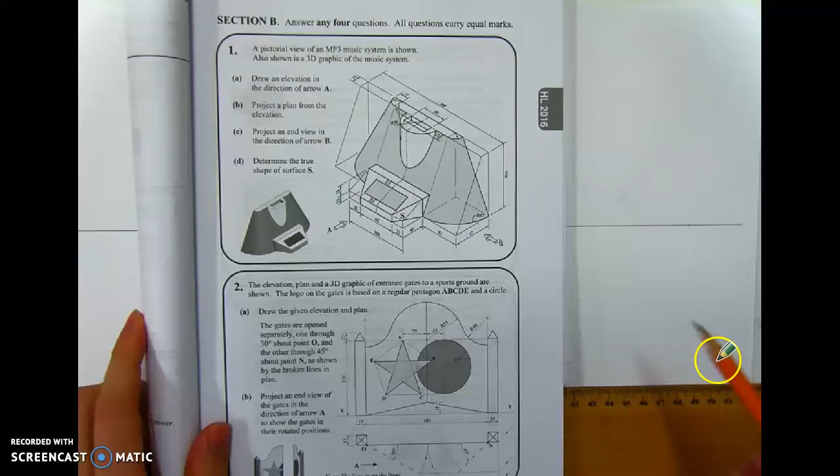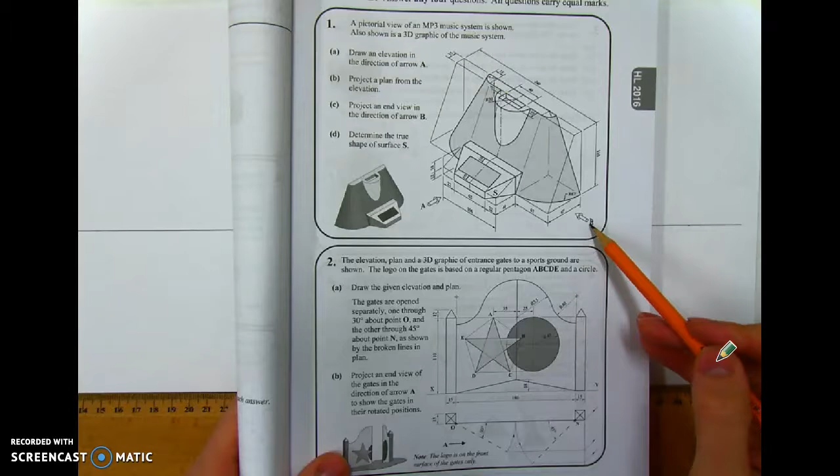This is 2016 question 1. Part A asks to draw an elevation in the direction of arrow A. So because it's positioned here on our end elevation, they want us to take it to the left. We're going to position our elevation in the top right hand corner.

So the overall height is 110. We're going to measure down 120 to our XY line and leave a space from the edge. Come in roughly 20 to 30 millimeters. The overall size of the speakers is 110 by 240. So put it inside a rectangle.

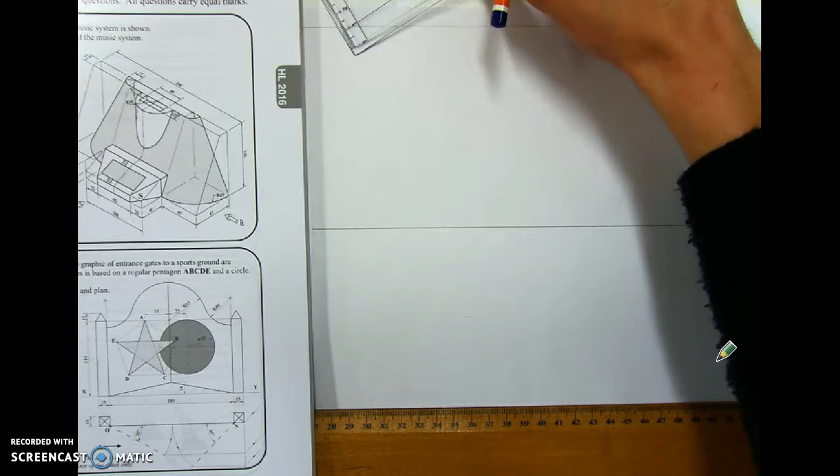Now mark up all of our heights and all of our lengths. 67, 22, 62, 22, and that should leave us with 67. We can bring our heights up nice and lightly, 2H pencil.

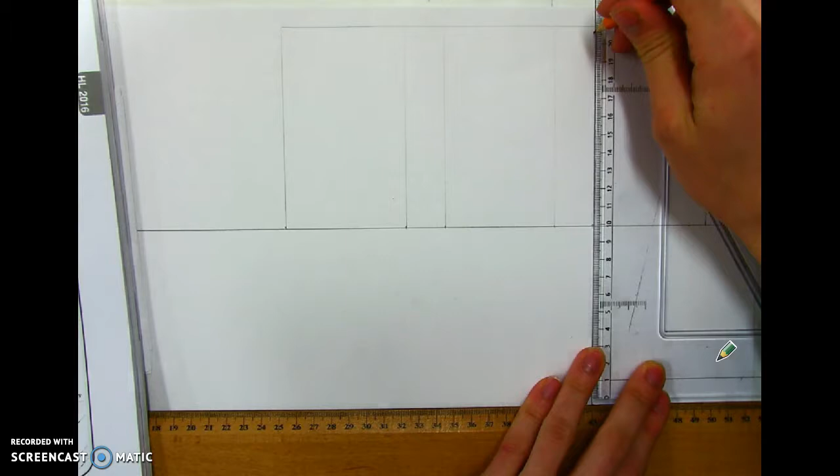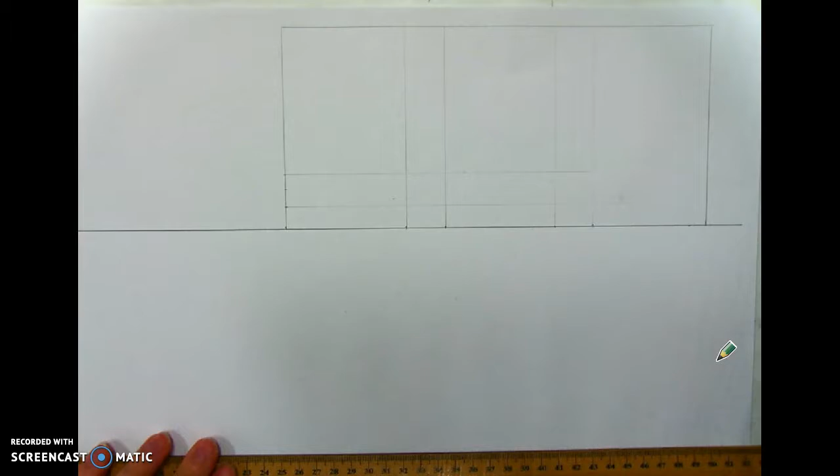We will take our heights now along the side. 22. Sorry, apologies. 12, 18, 12 and 18. Now at this point we start to harden in some of the detail on the elevation.

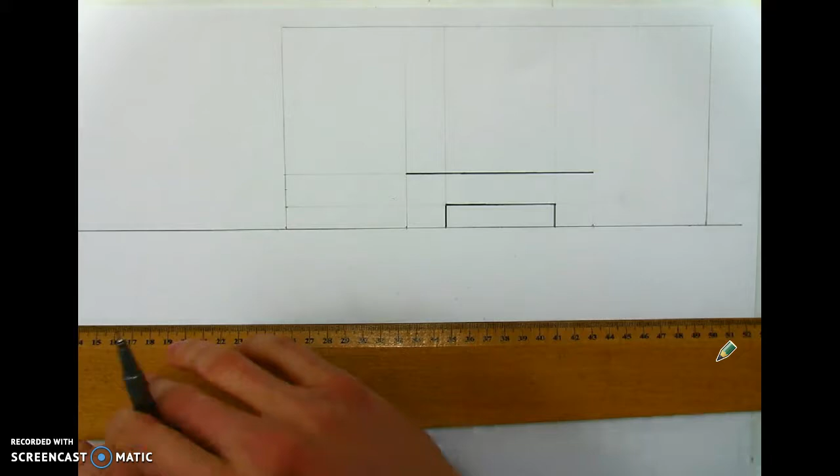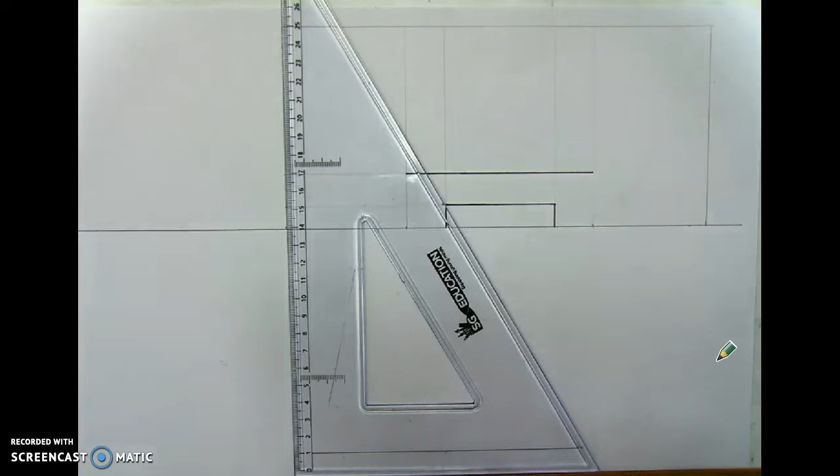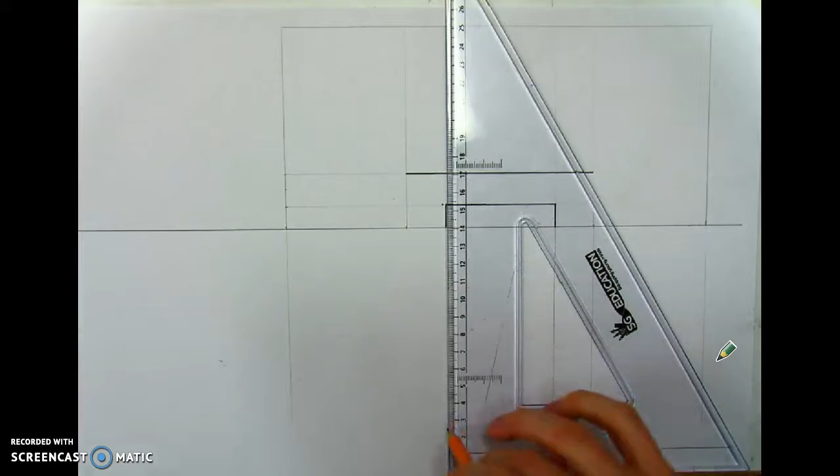Now we're going to bring this down into our plan. Leave a gap of 20. And our depth is 67. And at this point we step out a further 40 mil.

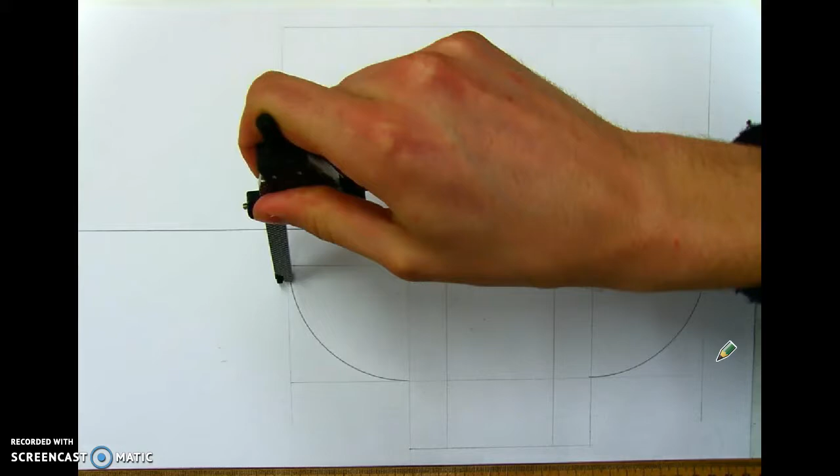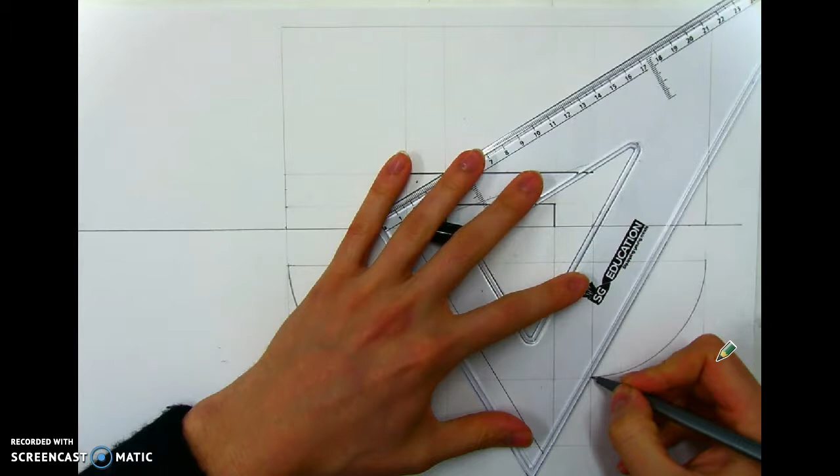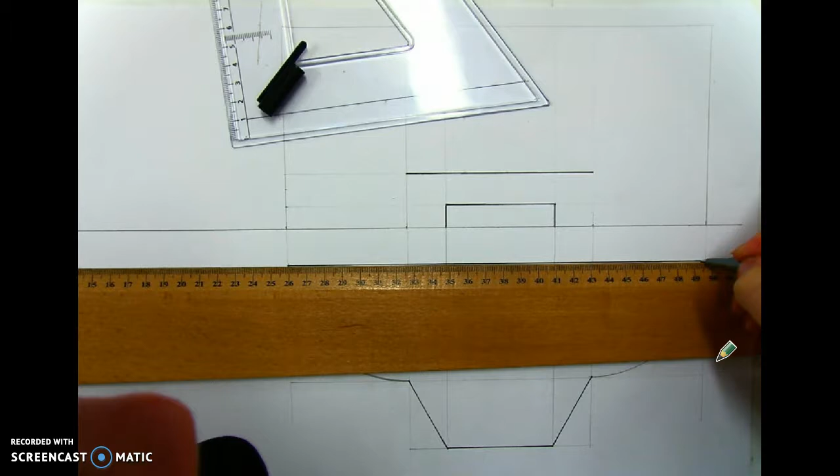Going to mark the radius on both ends. Step back 22, which we've already done here at this point, and we join it back like so to touch the base. We must then mark the radius, smaller radius on the top, 15 mil.

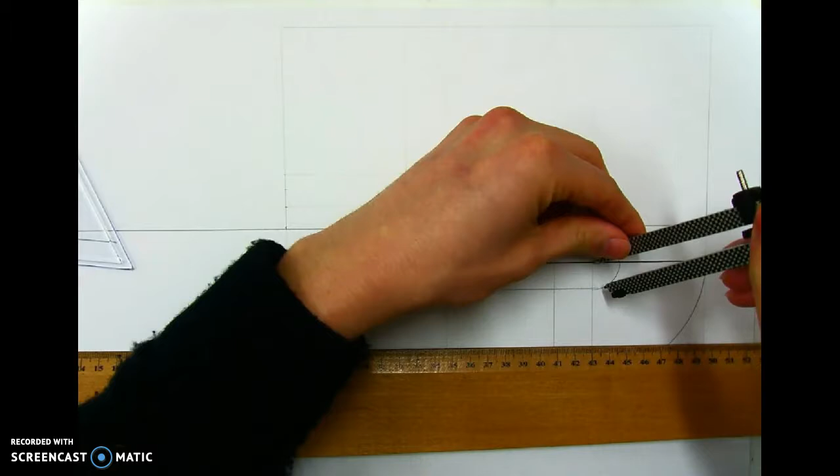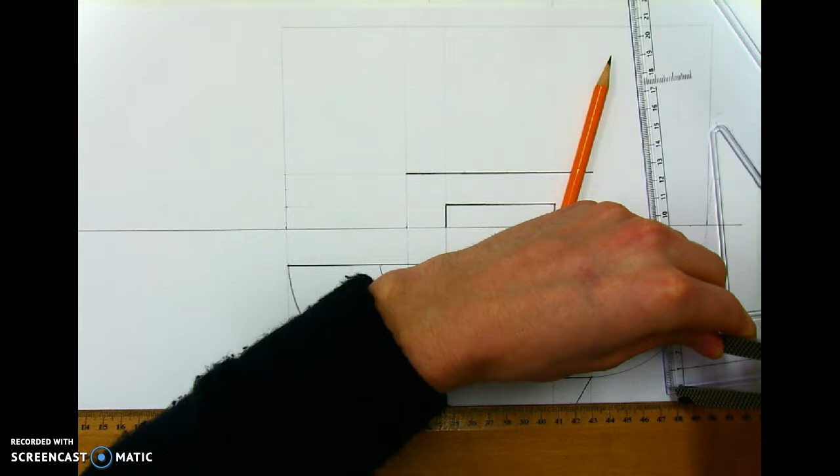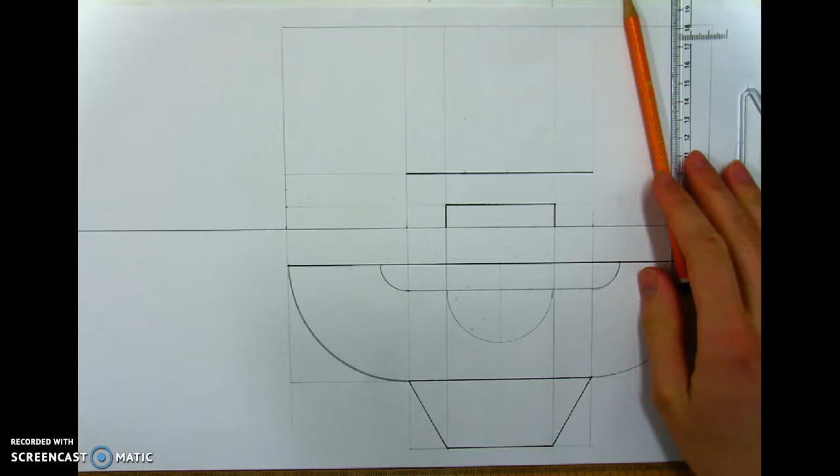Find the center line, halfway in, which is 140, and we have a radius 30 mil then to mark from the top view looking down. In that we have a 15 mil slot, 40 mil long, so 20 mil either side. And it's 15 mil.

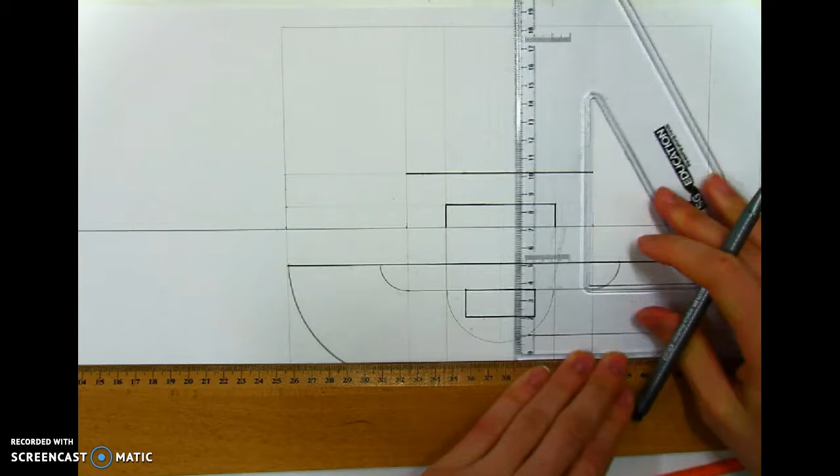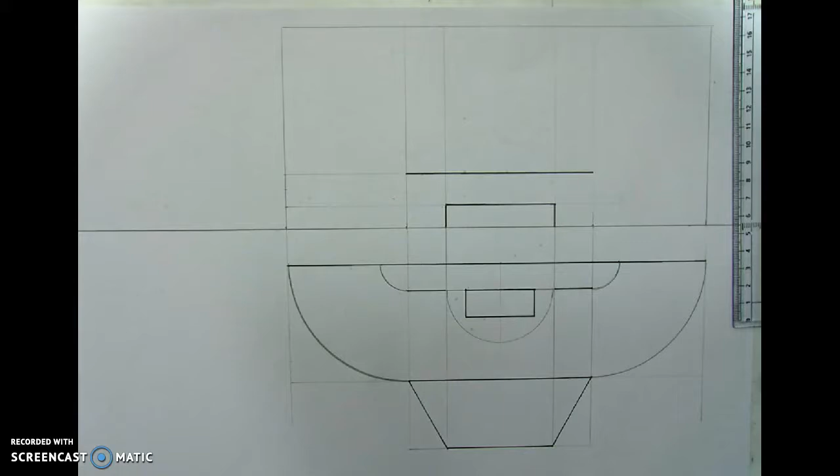We can't do the shape, the rectangle on the slope surface, or can we do this part until we work backwards from our end view. So from here we bring our lines across, just draw in our YY line, extend that line down there, bring all our points over to it. And bring them up at 45 degrees.

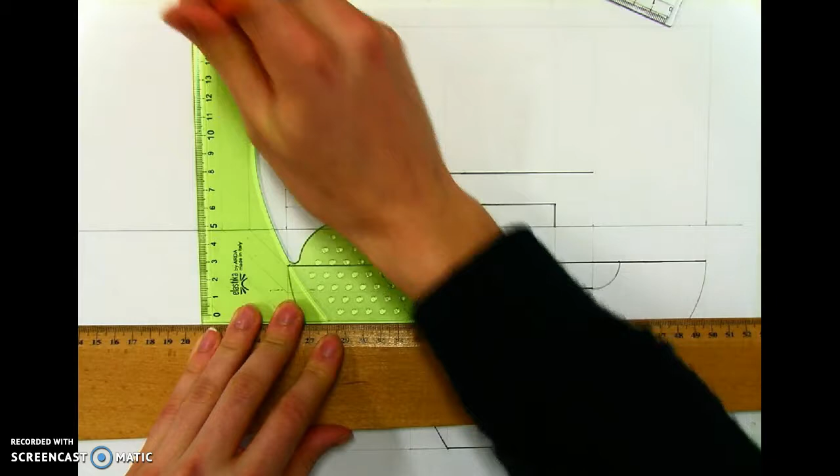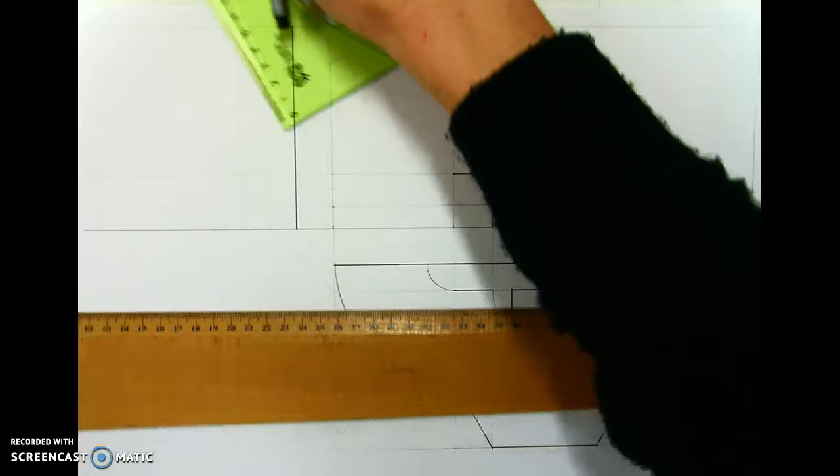So we're going to continue with bringing all these lines up and bringing all these lines across. Once you have them all brought across and all brought up, harden in the ones we want with your HB pencil. So we have the side, and we have our slope surface coming down.

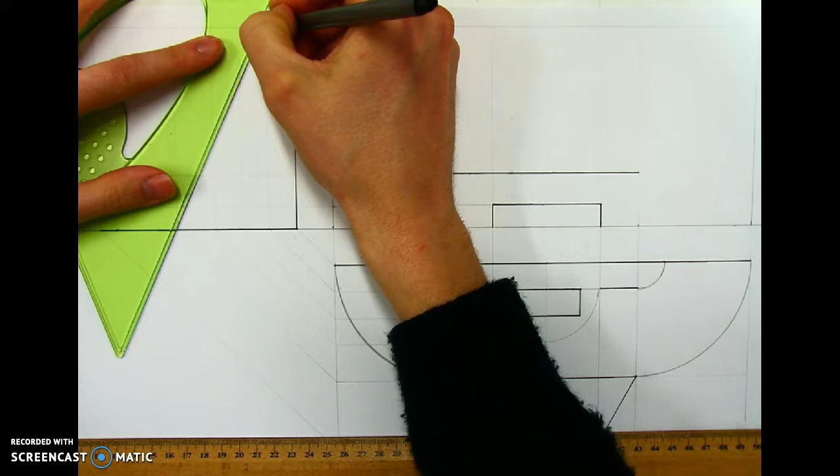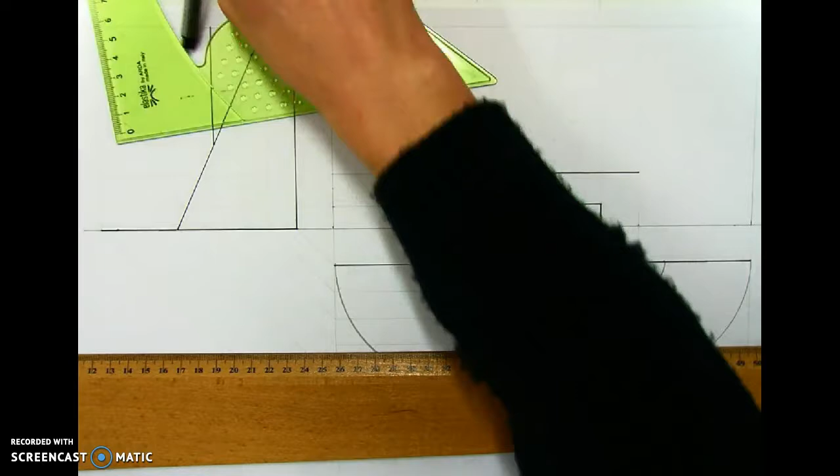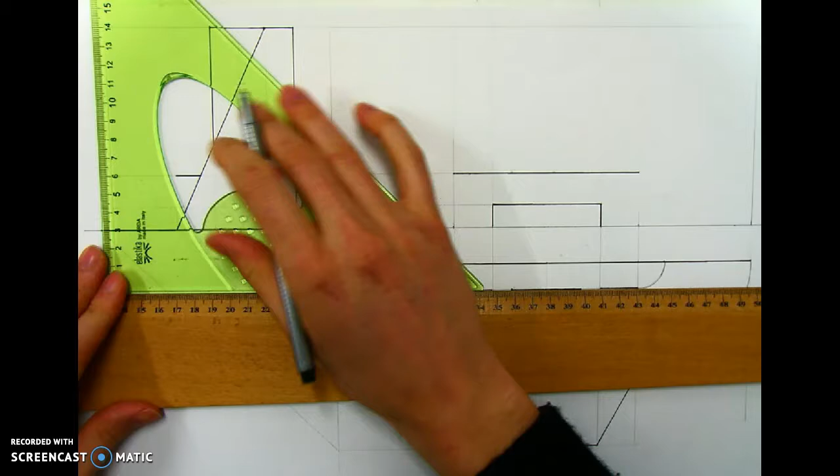From that we have our curved surface which sticks out. We also have this surface which is on front here for the MP3 to dock and slants backwards like so.

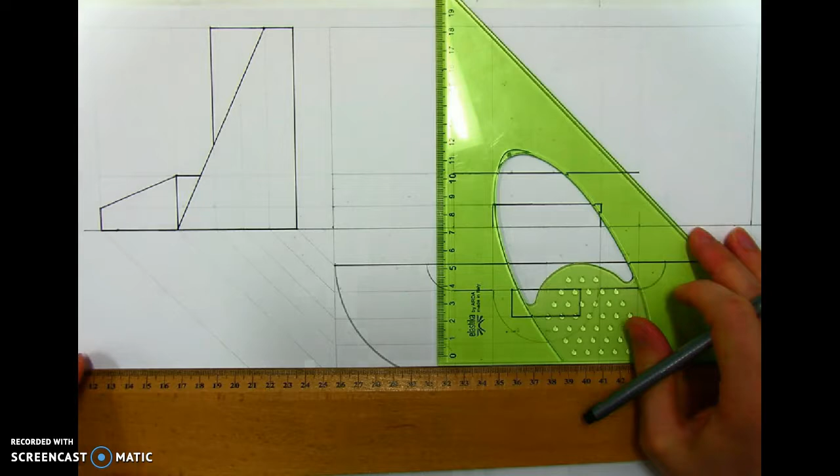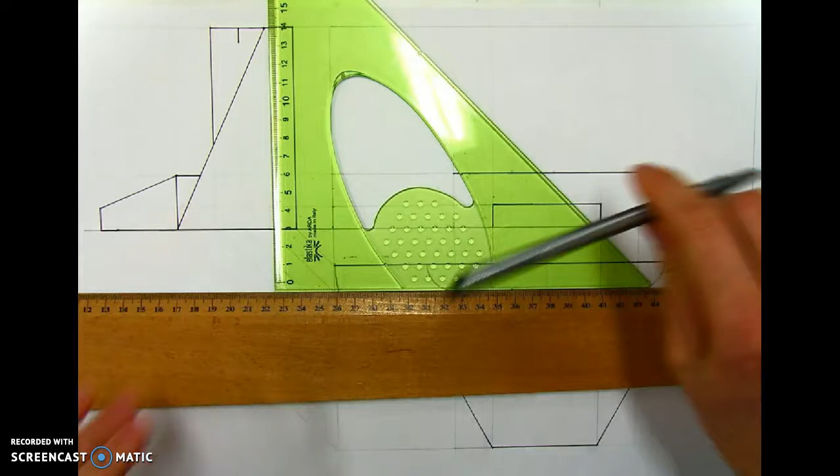We have a little bit of hidden detail to work with too. We're told that this little slot up here has a depth of 8 mm. So when we bring the points for it back up, we need to drop them down 8 mm. That should be hidden detail. However, I had the wrong pencil in my hand, but we can rectify that.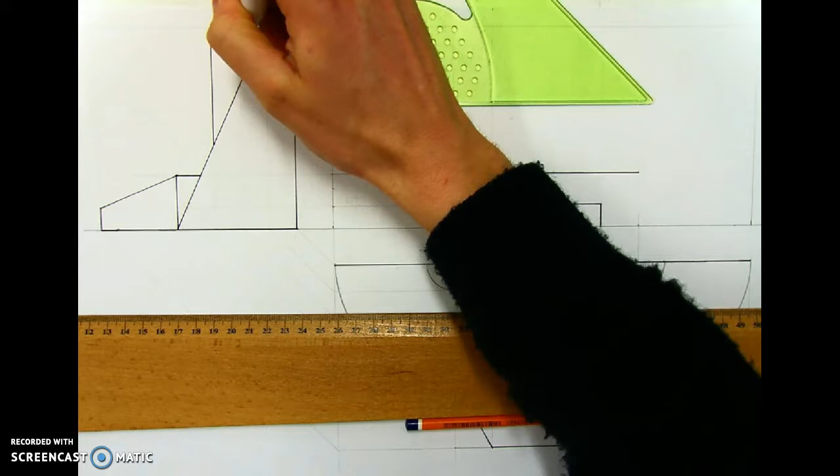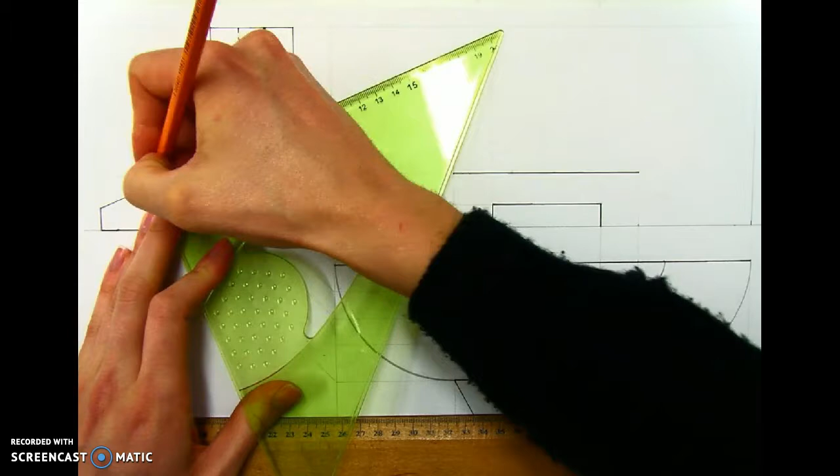There was a shape on the front here, a rectangle on the front, and it was in 10 mm from the edge, 10 mm from the top. So I bring that down to bring it back to the base. We could only find that in the end view and work backwards.

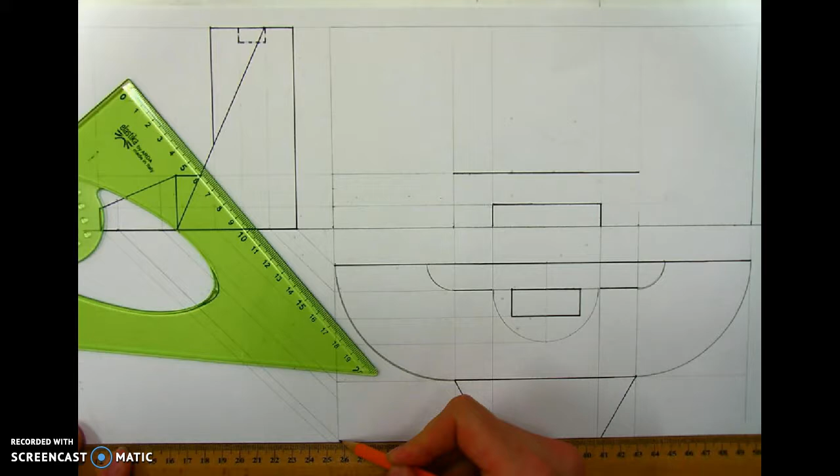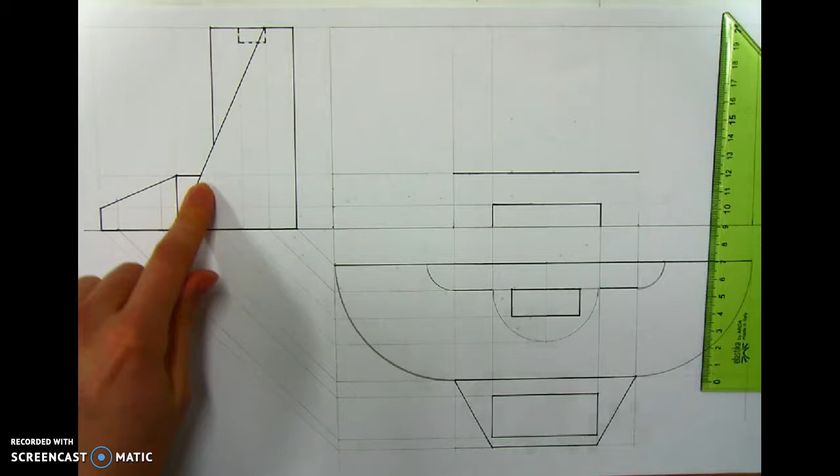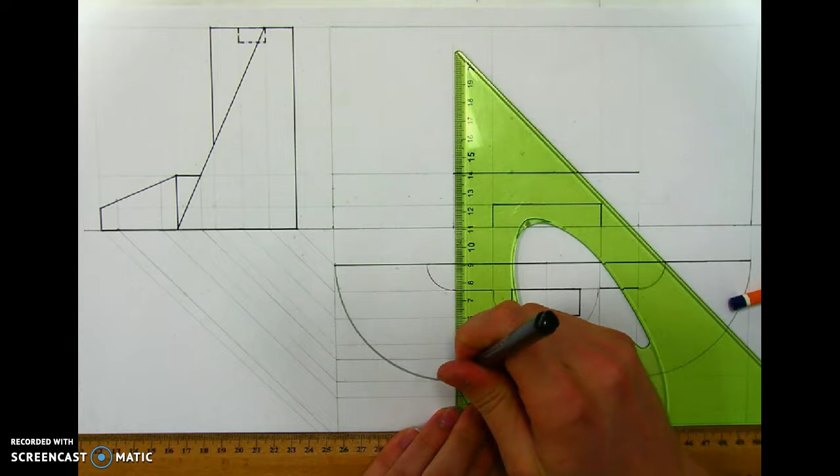And then we can transfer it back across onto the plan. That can be darkened in down here as follows. And we had to also find this little bit of detail here and bring it back down to our plan, to find how far back it goes. And that is the plan complete.

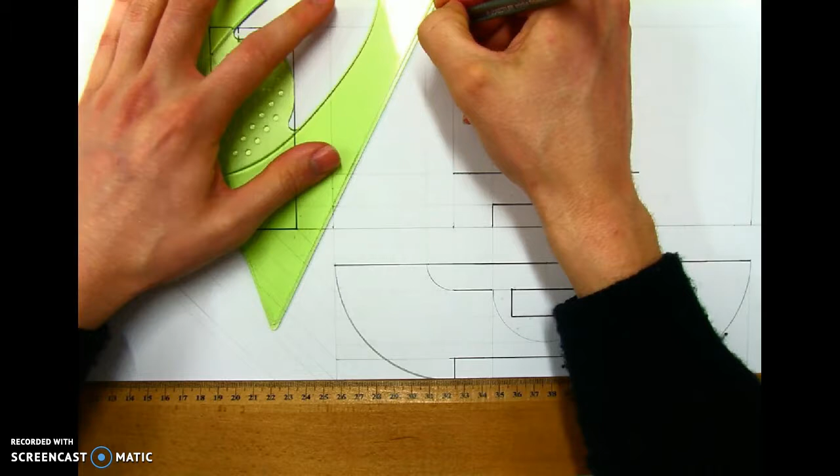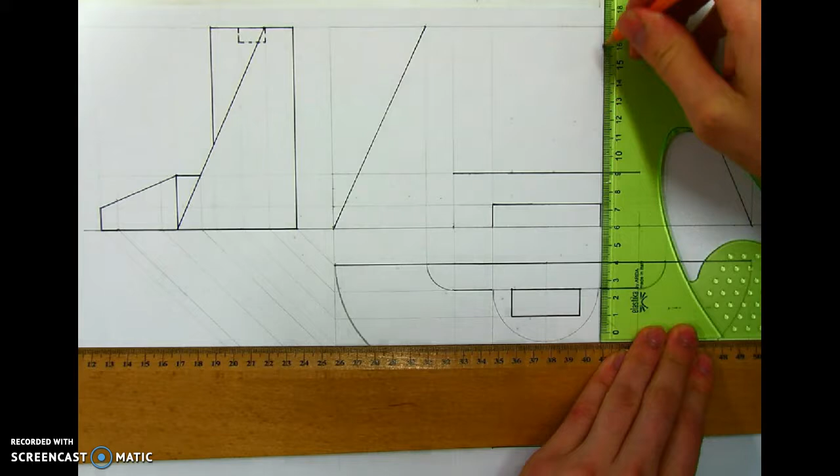Now we must finish our elevation, bring our points up. And we must split our circle in plan to find a curve up the top. We must split it up 30-60.

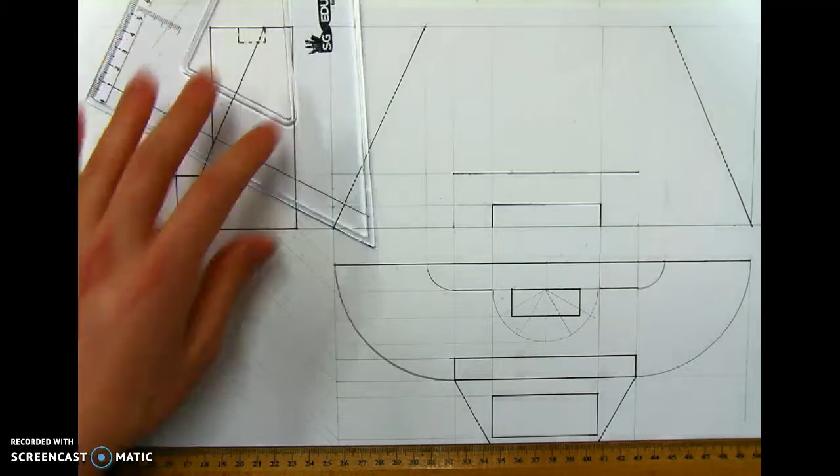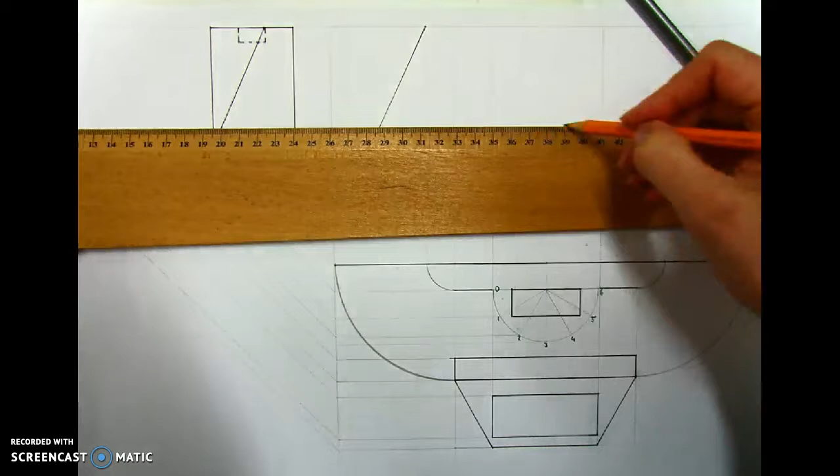Zero, 1, 2, 3, 4, 5 and 6. We're going to locate each of them in the end view and then bring them across. Okay, so we bring them 2 points across. We have the top point and we need the bottom point also. Now we bring them up from the base.